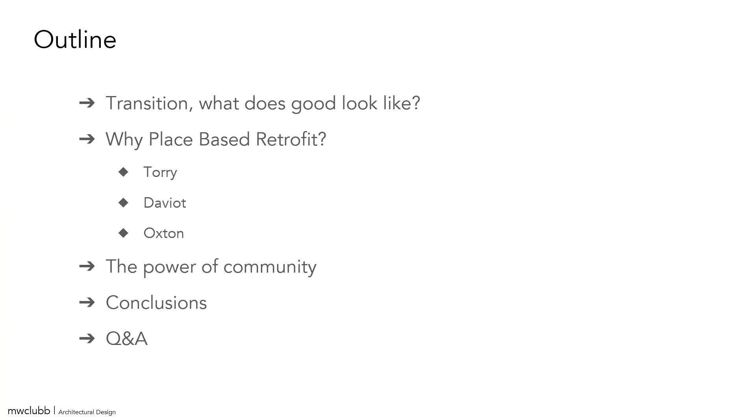There we go. So I'm going to cover what does good look like. I'm going to give you some place-based examples from a few projects we've worked on and just talk about community-based approaches and what I think needs to happen next. So yeah, this is us. I've got a team of 6 here. Our office is on Union Street, but we stretch our arms as far as Dundee and Inverness as well.

And we use a lot of technical methods to assess buildings and diagnose them. And we are also building pattern book approaches to different house types, because there are commonalities and things we can apply across different building types. And we do a lot of community engagement work as well.

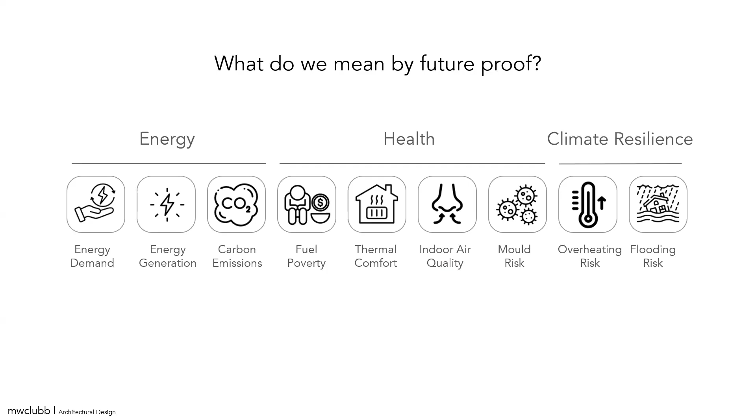So we talk about future-proofing buildings, because although I know everyone here is very concerned about emissions and energy use, this really isn't just about energy. To us, future-proofing our home is about energy, health, and climate resilience. Yes, we want to generate good renewable energy and reduce our carbon emissions, but if we don't deal with fuel poverty and mold risk and overheating risk and flooding risk at the same time, then our kids aren't going to forgive us.

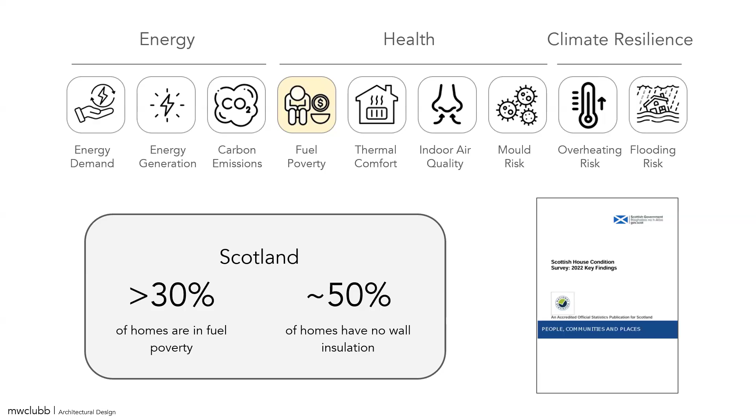So just to touch on a couple of these, fuel poverty is over 30% in Scotland now. The Energy Saving Trust has been around for 30 years and fuel poverty has actually only gone up. So we need a step change in how we're doing this. And of course, that causes a lot of impacts on the NHS, and stress and anxiety is a big factor in fuel poverty as well.

Thermal comfort, we all like to be cozy. It's amazing how reticent people are on actually living in cold environments. People do die from extreme cold every year, thousands in this country, and we need to get away from these peaky, spiky curves of heating into smoother heating curves, because that helps with heat pump efficiency as well.

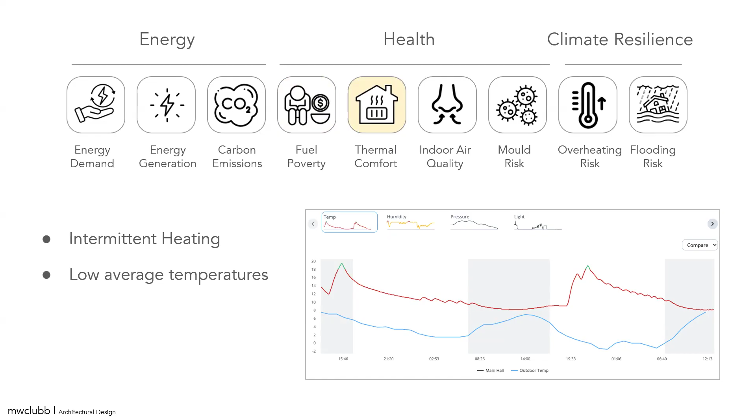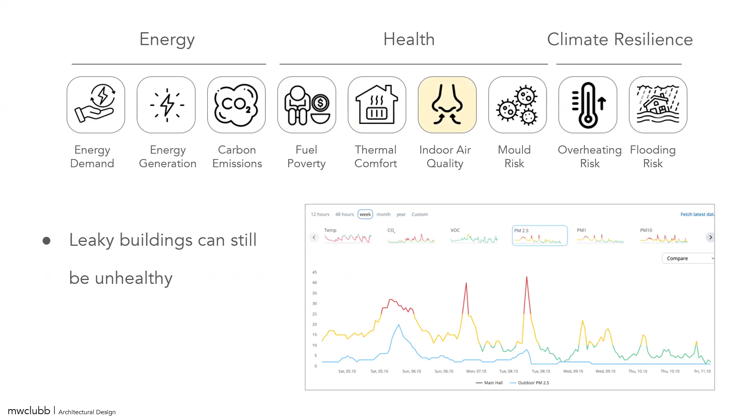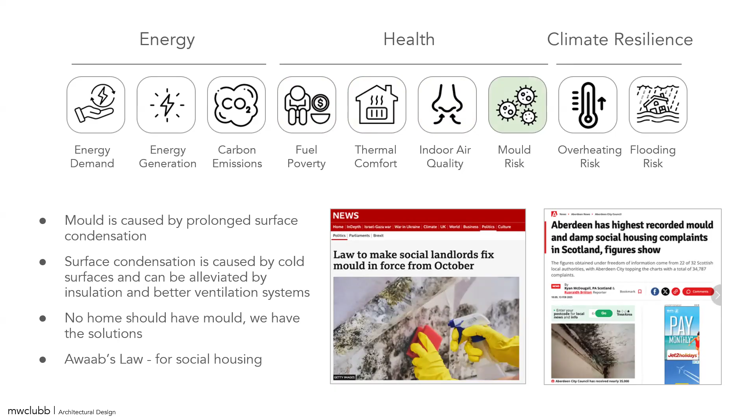And a lot of the time that's also linked to mold risk. Mold's a bit of an epidemic now in this country. We've got the introduction of Awaab's Law, which should make a huge difference in social housing, but we see mold in at least 50% of the buildings that we survey. And not forgetting overheating risk. By 2050, we'll potentially have 8-degree hotter summer days in Scotland. This week's a great example.

Flooding risk: we'll have 25% more rainfall. So you don't have to be living near the coast or by a river. That level of rainfall, are your gutters designed for it? Are the sewers designed for it? These are all the things we've got to think about.

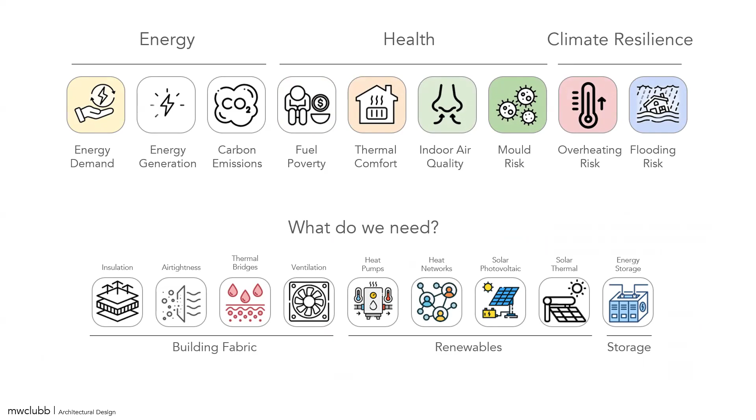So we need a raft of different solutions to solve this. This isn't just about heat pumps and renewables. We've got to look at a spectrum of solutions, and that's what we do. We impartially look at all that and we put it into a plan. So this is pretty typical of what we can do.

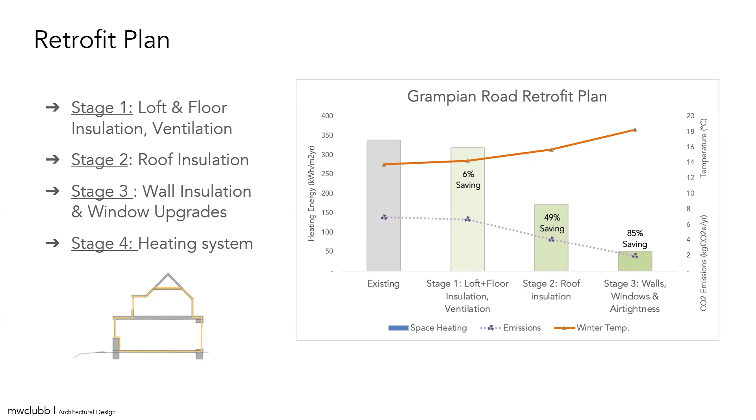Most houses in the Northeast, because they're so poor on energy performance, we can come up with a plan to reduce energy loss by about 80 or 90%, but we do it in stages. So we increase comfort on the orange line, and we reduce emissions and energy loss and build it into a plan. So what does this look like on a place scale?

So a few examples here, starting with heat networks. Heat networks are great, absolutely great, but they're not a solution in and of themselves. So Torry, I'm sure everyone in here is familiar with the energy from waste plant that's now been installed in Torry. It's generating enough excess heat. They call it waste heat.

Excess heat to heat potentially most of the homes in Aberdeen, but at least the homes in Torry. So this is the plan for the heat network, which is currently being rolled out in Balnagask. And in theory, it's been pitched as solving fuel poverty.

I think the reality is it's not going to do that because the maintenance costs of the network itself are quite high. But to our point, it's not going to do anything about air quality or overheating risk or necessarily thermal comfort or flooding risk.

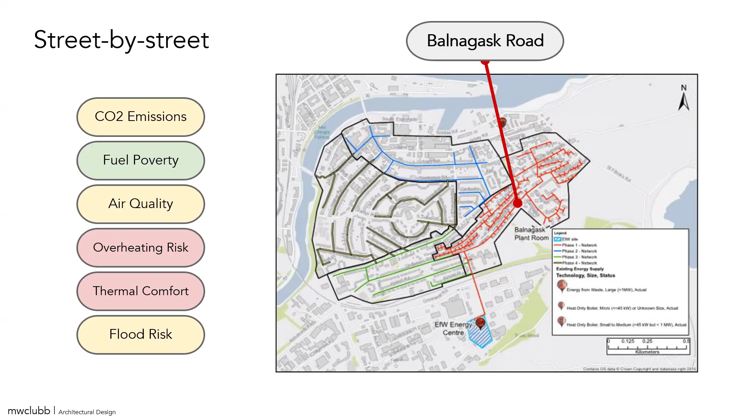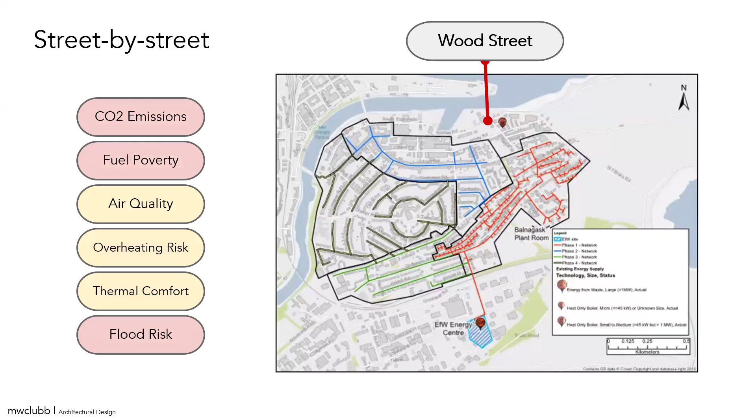And if you take a house on the edge of that area that isn't going to be on that network, you've got a different sort of set of challenges, because you've got the emissions and everything on top of that. So heat networks are fine, but they're only serving one kind of purpose.

So another example here on a project I'm working on in Daviot. So I live in Daviot, which is a village out past Inverurie. And again, I'm looking at how do we decarbonise the whole of Daviot, but how do we actually future-proof the whole of Daviot? And we're going to need a mix of solutions, as I've said.

So we know we've actually got a piece of land just behind the church that could host a 2 megawatt solar array. We know that we've got lots of different building types. We've got roughly 3 different types of building, but they've all got varying energy efficiency. And we know we can look at heat networks because it just works even on a small scale like this. What if we could get all those solutions together in one solution?

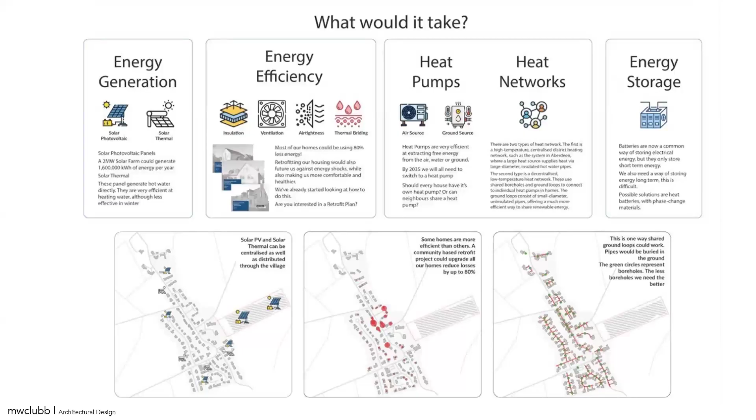So at the moment, I know that we've had a feasibility study done on the solar farm that would generate about 1.8 gigawatt hours of energy a year. At the moment, the 200 homes in the village are using roughly this much energy for heating and electricity. Now, if we can go and do retrofit and reduce the energy loss from those buildings, then I've done a modest sort of 60% here across all the homes, accounting for some shortfalls or whatever.

And then finally, you make the switch to a heat pump. And if we use ground source heat pumps on what's called shared ground loops, then we could expect to get 400, 500, maybe 600% efficiency. So all of a sudden, look at that. We've got free energy for everyone in the village, heating and electricity, if we can manage the storage cycles of energy through the winter. That's the biggest part of this challenge.

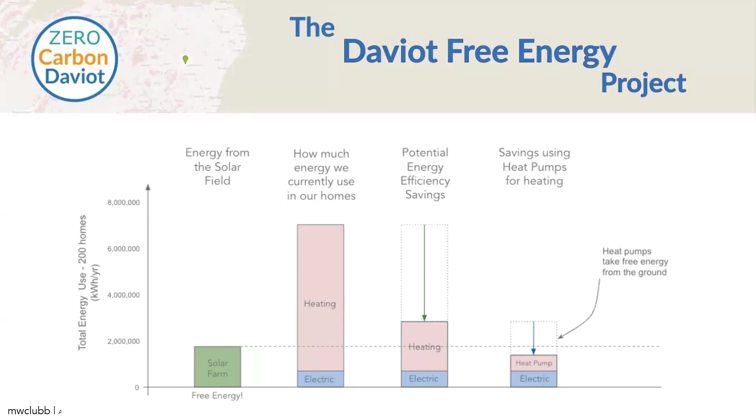But the other challenge we've really got is that we're grid constrained. So we've had a feasibility study done on the solar farm, and we are grid constrained to the north and the south, which makes our project completely unviable at the moment unless we pay millions to upgrade the grid ourselves.

And the other challenge is really the funding model. So, at the moment, there's funding for little discrete things. There's funding for the solar farm. There's funding for an individual to get some money from Home Energy Scotland for their own home. But we don't have this strategic approach of doing this. And there are organisations like Living Places and Bankers Without Boundaries looking at funding models that would work for this. But that really is the hot topic for me at the moment.

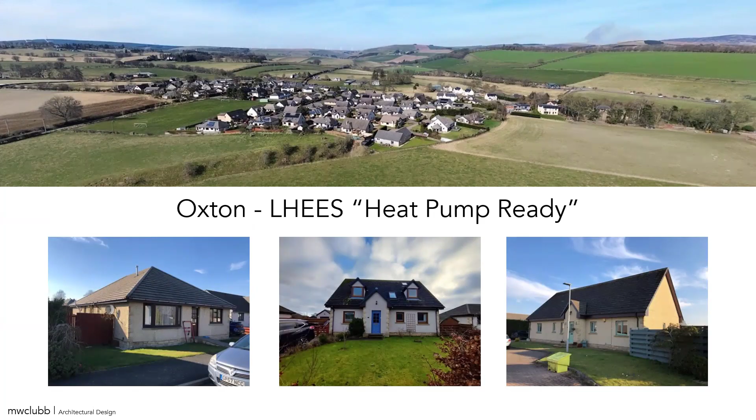Another project we've recently worked on in the Borders. This is the village of Oxton in the Borders. And we were asked to do some retrofit engagement work here in Justice Park, which is a collection of 45 timber frame houses built in the sort of late nineties, early noughties. And in the council's local heat and energy efficiency strategy, this cluster of housing is labelled as heat pump ready. So is it? Now, of course, it's not.

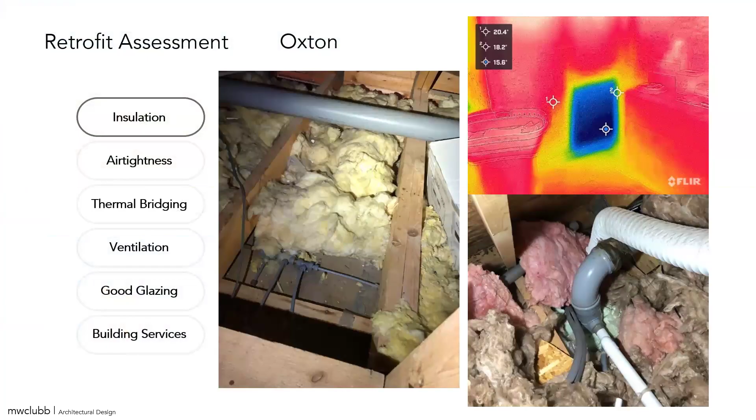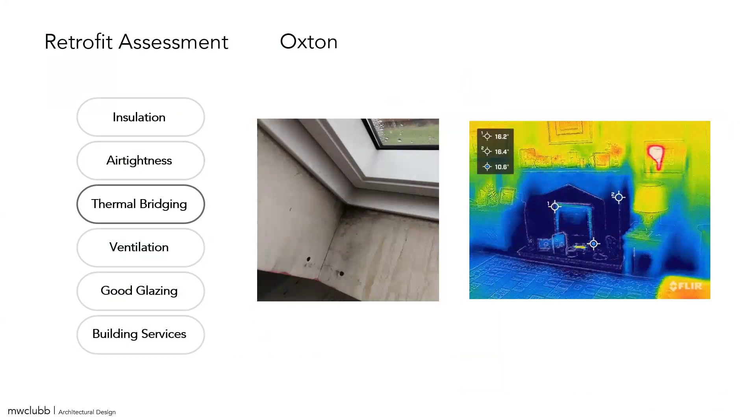So we did a number of surveys. I think we surveyed 8 buildings in total, and really typically found lots of missing insulation, disturbed insulation, cold bridging, air tightness issues, thermal bridging that was actually causing mold in several of the homes that was really bad, and very poor ventilation systems, and glazing was a bit of a mix, but still some single glazing in some of these buildings.

They bulk buy all their oil, and they bulk buy all their LPG, and the LPG is actually a buried tank in the ground that is piped around the whole park. So they've got their own little gas grid. And it's like, well, Jesus, if we can do that, why the hell can't we do a ground source heat pump network? So yeah, and then you look at the pipe work now.

Now, can the grid handle it? The grid in this part of the world is managed by SP Energy Networks, and this is their online portal where you can look at grid capacity. And a red line is bad. So they are grid constrained, as we'd call it. And so if you put anything in here, the grid's going to need upgrading.

So, overall conclusions from all this are that every home is different. They might look the same on paper, but we have a lot of crap data on housing on the national database. We need much better data. And ultimately, that's actually a really good way of engaging people as well. So yeah, you've got to go in every home.

And doing those simple stage 1 measures that I had in that table there, all those measures were things that are actually not that disruptive. They had very common air tightness issues around skirting boards and windows. They all needed new fans. There was lots of accessible loft insulation that wouldn't be disruptive. You just need to get in there and redo it all properly. And smart thermostats aren't disruptive.

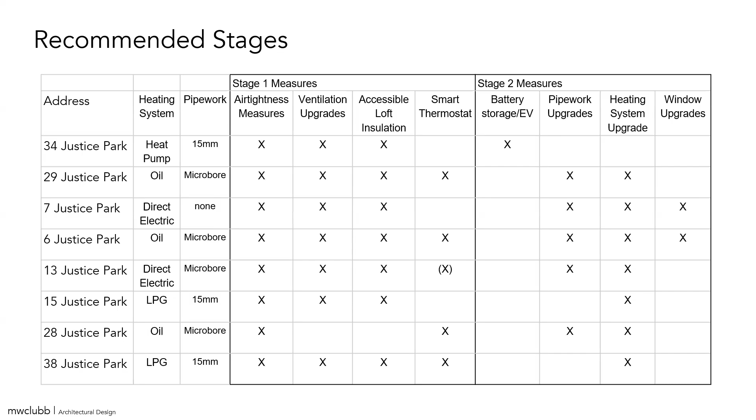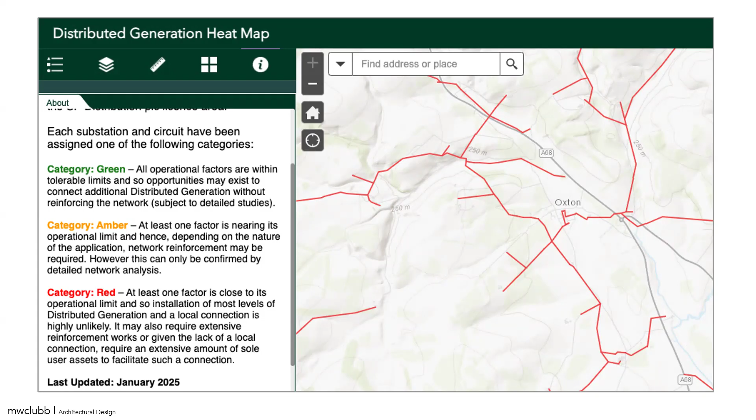And if you did all that, you'd reduce the peak heating demand by 25%. So that means 25% smaller heat pumps, means 25% potentially less grid upgrade. Okay, we've got to think about electric vehicles for all the houses and things like that. But the point is, this is why we need a package of solutions. And if you could put everyone on a heat network and not have such heavy load-demanding heat pumps, then again, that's going to help.

And the other thing that was really interesting for me was that all of these homeowners living in rural locations really struggled to get tradesmen in for any sort of job. And now, hey ho, I've got at least eight, maybe 42 homes that all need similar measures. That's something I can take to a medium-sized contractor who's going to have the certifications, who's going to be interested in this, and might even give us a bulk discount. So aggregating demand really enables action.

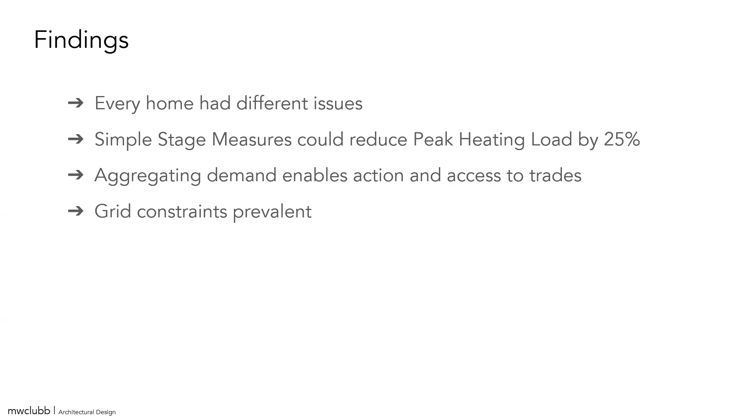Sorry, I'm probably over my time, but my overall conclusion at the moment is that the grid is constrained everywhere you look. So if you want to get a heat pump, get in there quick and do it now, because at some point someone on your street is going to ask for it, and they're going to say, no, we've got to upgrade the substation. The reality is we need heat networks, and we need retrofit to reduce the amount of energy that we're going to use, so that we don't have to upgrade the grid. We need everything all at once.

The way that the grid is currently assessed is really dumb. I've been lucky enough to be part of some workshops, one with SP Energy Networks, and they showed me the online tool that they have internally, and they can simulate any house connected to the network for a heat pump or an EV. So you can select the row houses and go, right, I'll put heat pumps on all those and EVs on all those. And when we did it on a little trial down in Clackmannanshire, things immediately started going red.

And the shocker is, in the next version of that platform, they'll be able to evaluate solar PV, but they can't do batteries yet. And batteries are going to be a really key component of this whole mix of understanding how we balance the grid on a local scale. So I think the distribution network operators have got a long way to go until we get to some really intelligent rollout. And that's the next stage for us: we're looking at how we develop tools that help that. And community collaboration, as I've shown, is absolutely key.

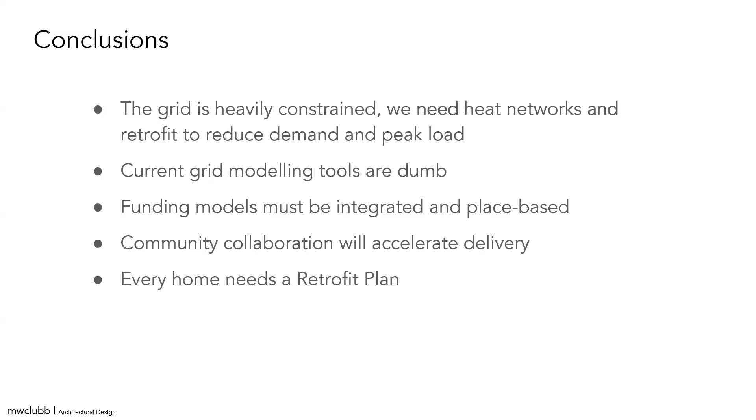We've got to sell this to everyone, right? We've got to go out there and sell this to everyone. And how are we going to do that? A lot of people just don't care about emissions. But if you can tell them that they're going to be warmer and have a healthier lifestyle, a healthier home, that is a really good engagement tool. So we need a retrofit plan for every home.